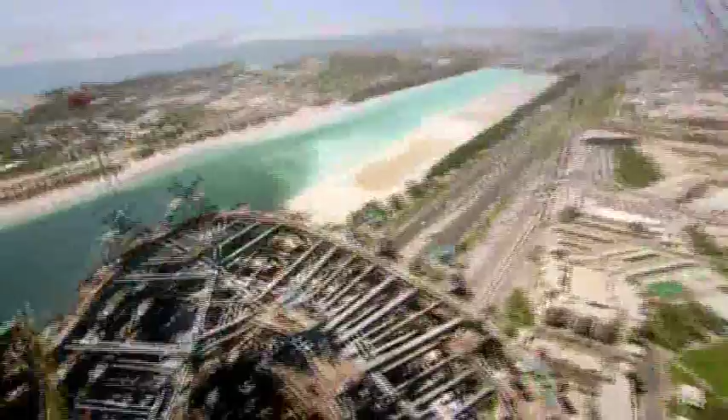Dubai is famous for its audacious engineering projects. But now, its neighboring city, Abu Dhabi, could surpass them all. This is Capital Gate, the most inclined skyscraper on the planet. It defies gravity, leaning at almost 5 times more than Italy's Leaning Tower of Pisa. To make it stand up, it'll take some extraordinary engineering that could rewrite the skyscraper rulebook.

Situated on the edge of the Persian Gulf lies the Sheikhdom of Abu Dhabi. It's the largest and richest of 7 states that unified in 1971 to form the United Arab Emirates. Abu Dhabi is undergoing one of the biggest makeovers of modern times. Its ruler, Sheikh Khalifa bin Zayed Al Nahyan, wants to join the City Super League. And he's spending over $200 billion to transform his capital into a world-class business and tourist destination.

He's already spent a reputed $3 billion creating the most expensive hotel ever built. The Emirates Palace boasts 114 gold domes and is the height of luxury, where rooms cost up to $12,000 a night. And that's not all. He's built one of the largest and most opulent mosques on earth. Capable of accommodating 40,000 worshippers, the Grand Mosque boasts the largest carpet on the planet and the world's biggest gem-encrusted chandelier. But even these structures have not quenched his thirst for the extraordinary.

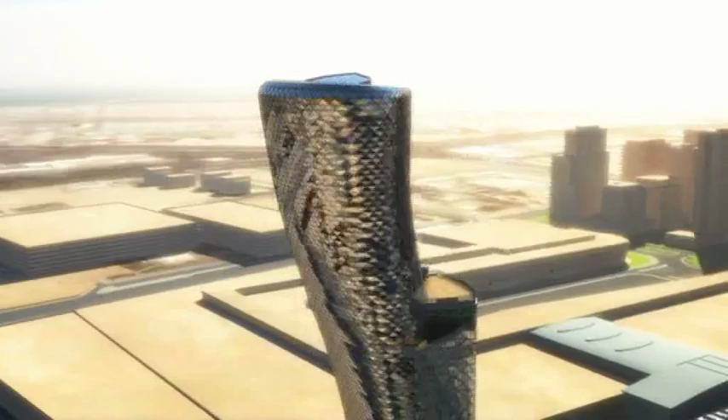The team come up with an extraordinary design. A tower that spirals out of the ground to 160 meters. Inspired by a desert whirlwind and the splash of a wave rising over the sand. This gravity-defying skyscraper tilts almost 5 times more than Italy's Leaning Tower of Pisa. No single angle of this tower is the same as another. It's a structure guaranteed to amaze. We really wanted this to happen. They could see a vision suddenly. They could see something that would stand for them. Then there was no stopping us.

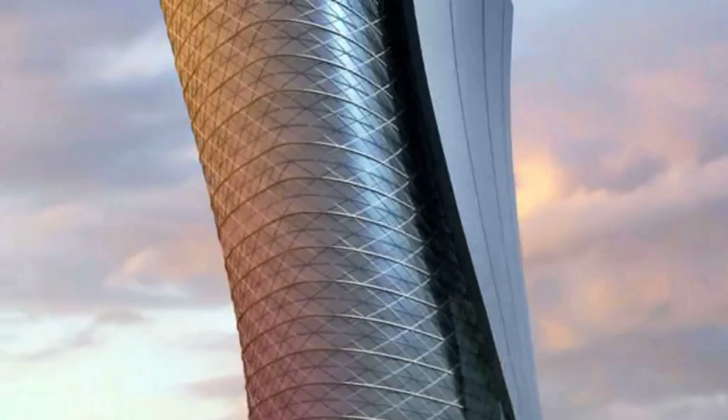Sheikh Sultan wants the lower floors to become the most prestigious office address in Abu Dhabi, with the top 18 levels assigned as a 5-star hotel fit for royalty. But for maximum impact, this landmark skyscraper also needs a prestigious location. The Sheikh decides the tower will stand next to a monument of national importance, the Grandstand. Built by his uncle and founding father of the United Arab Emirates, Sheikh Zayed, it's used to this day for national celebrations. This monument and the skyscraper will link Abu Dhabi's future with its past.

Over the past 50 years, this land has experienced extreme change like no other. The discovery of huge oil reserves in 1958 set the wheels of progress in motion. Abu Dhabi's ruler, Sheikh Zayed, had a vision to unify the sheikhdoms and secure their financial future from Western dominance. He then set about using his black gold to create a city that rose out of the desert. Today, Zayed's legacy is all around, and now his son wants to leave one of his own. To transform Abu Dhabi once again, but this time to put it on the world map.

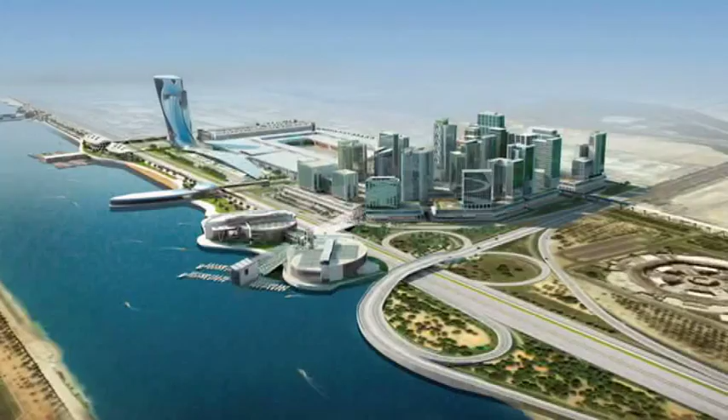Sheikh Khalifa plans a new $2 billion business district called the Capital Center. Situated alongside the Middle East's largest business hub, the Abu Dhabi National Exhibition Center. It's the ideal location for an architectural icon. And inspired by its location, the new tower is named Capital Gate.

Now, the idea must make the leap from the drawing board to the construction site. The only problem is, no one has ever attempted a skyscraper like this before. Everyone realized that this is a crazy structure to build, and how are we going to build it?

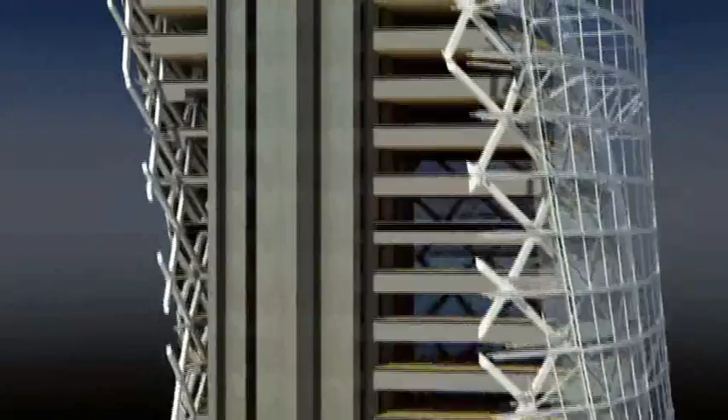To make Capital Gate's gravity-defying design a reality, it'll take some extraordinary engineering, and the challenge begins on day one. Its top floors overhang its base by 33 meters, creating huge forces that want to rip the building's foundations out of the ground.

At the construction site, project architect Tony Archibald is daunted by the task ahead. When I first joined the job, I was shown the drawings, and I kind of did a double take, and I wasn't quite sure that I got the correct understanding of the project, and it took me a few moments before I realized what we were about to undertake.

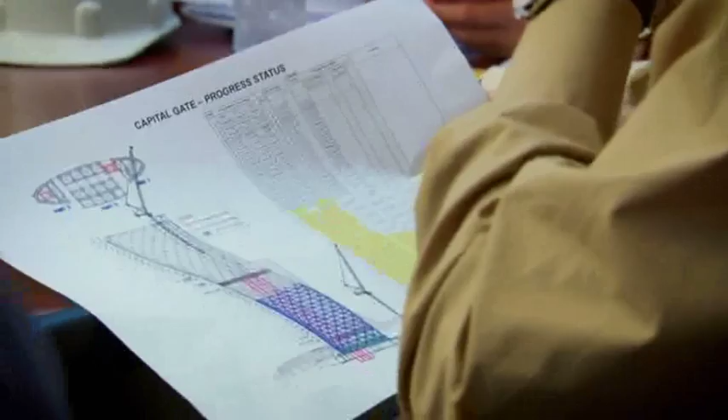Keeping Capital Gate upright is a huge engineering challenge. There isn't just one solution. To overcome the forces of gravity, it will take a whole range of pioneering techniques. But the task starts with the foundations deep underground. On one side of the building, the weight is going down into the ground. On the other side, it's being lifted out of the ground. And that's due to the large overhang that we're having to deal with.

The solution requires almost 400 concrete piles that work in two different ways. On the leaning side, half of the piles push the overhang's forces into the ground. On the opposite side, the remaining piles anchor deeper into the bedrock. They resist the stretching forces trying to wrench the building out of the ground. Finally, to evenly distribute Capital Gate's forces into the piles, a deep concrete slab reinforced with steel is laid on top. What the foundations taught us is that every single aspect of this building has to be custom engineered.

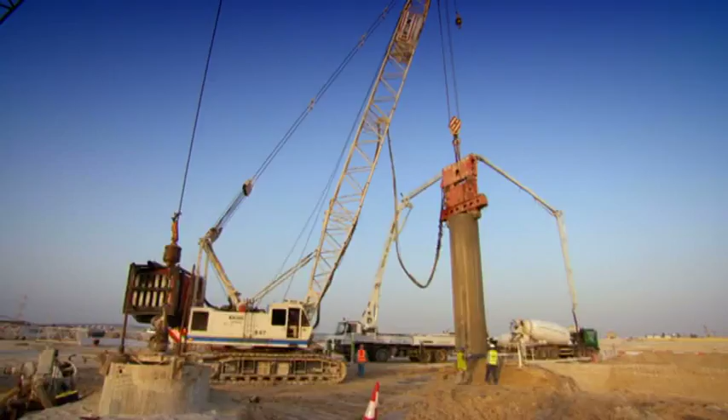Excavators dig out a colossal 6,000 cubic meters of sand. And over 8 weeks, hundreds of piles are driven into the ground. We had an awful lot of piles to put in at very close proximity. It was a real difficult challenge. There can be no let-up on this schedule. Sheikh Sultan wants Capital Gate complete by an impossibly tight deadline.

In less than 2 years' time, Abu Dhabi will host the World Future Energy Summit. Over 3,000 delegates from 50 countries and the world's press will convene at the neighboring Abu Dhabi National Exhibition Center. It's the perfect opportunity to showcase Capital Gate and prove Abu Dhabi is at the forefront of innovation. But this gives the team just 24 months to design and build a unique skyscraper.

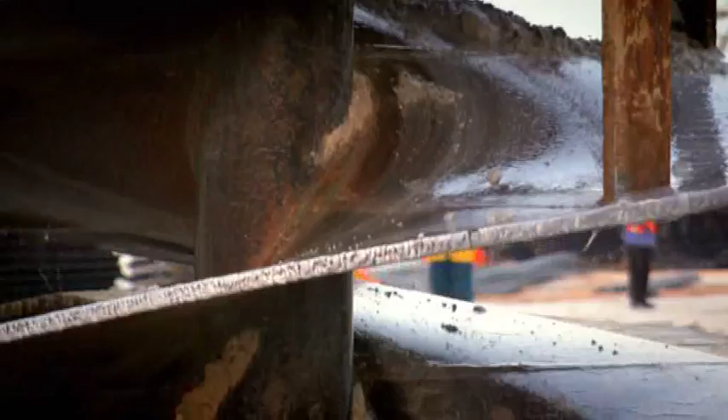With the foundations finished, building above ground can begin. But because of the dramatic lean, it will have to be constructed in a very different way to a conventional skyscraper. We realized once we'd done the foundations that this was going to be the first of many difficult problems. A normal skyscraper requires a solid core to hold it upright. But Capital Gate's curves will just crack and topple a standard core. Engineers must discard conventional thinking and devise a way to defy gravity.

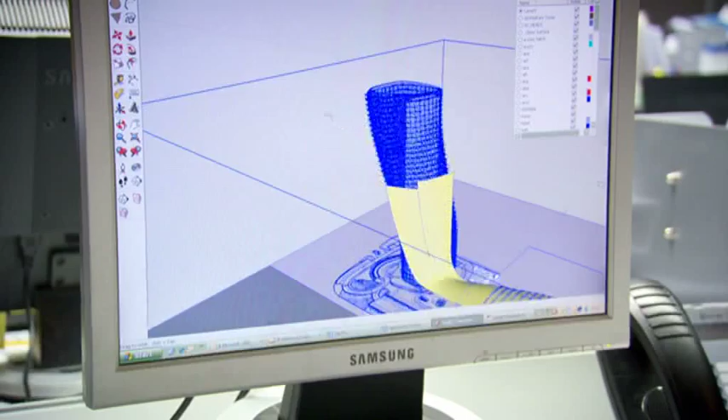Inspired by the nearby desert landscape and its wind-shaped dunes, architects have designed a curved leaning tower. But it'll take some audacious engineering to stop Capital Gate from falling over. Normal skyscrapers are built around a slim vertical core, which helps to channel the building's weight into the ground. There's so much overhang on this building that a conventional core, there was no way it was going to work. You just can't build a straight core. It's just not strong enough.

Capital Gate's design would cause a conventional core to bend dangerously. The pull of the massive overhang wants to stretch the core on one side, causing the concrete to tear apart.

Structural engineer Mona Vassi knows it's a serious problem that must be solved. When I saw this one, I thought it's impossible, it's not going to work. It's just some sketch somebody left somewhere. But I always think that for the architects, it's easier for them to just draw something, but it's not easy for us to fulfill or satisfy their needs.

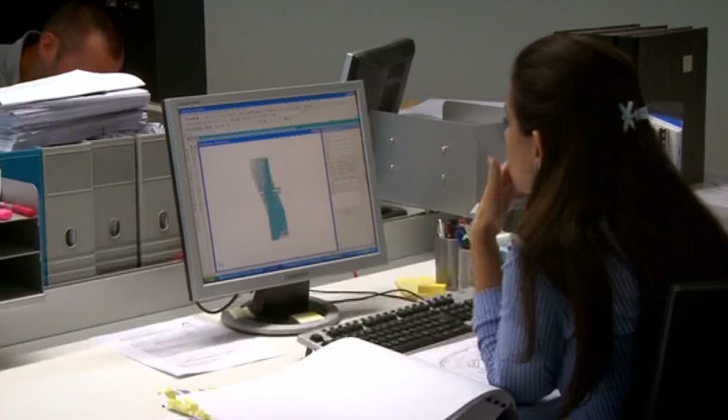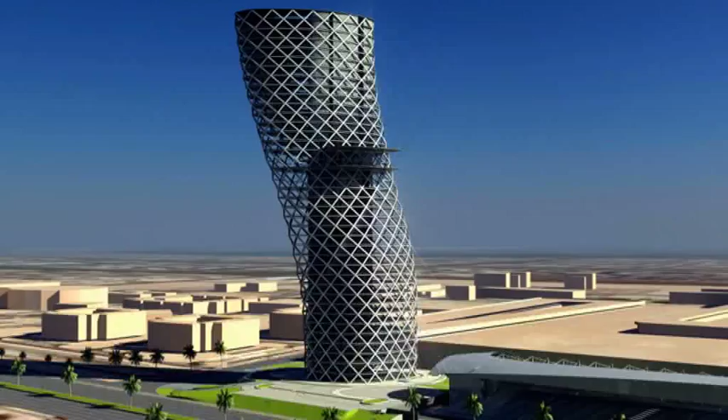The engineers developed two groundbreaking solutions. The first part of their plan is to build the core with a curve, bending in the opposite direction to the building's lean. As the structure grows, its weight pulls the core straight. In total, it shifts 350 millimeters, and the effect is significant. The concrete that would have been stretched by the overhang's pull will now be compressed and strengthened. You build it bent, and then as you add the slabs to the upper levels, it pulls it back into vertical. So basically that whole vertical core is in compression, and that gives it immense strength.

The core grows 4 meters a week, and construction manager Les Fairchild is in charge of building it. This is probably the most complex core that I've come across. It's built at an angle, and effectively the core holds the whole building up. The core is built using a technique called jump forming.

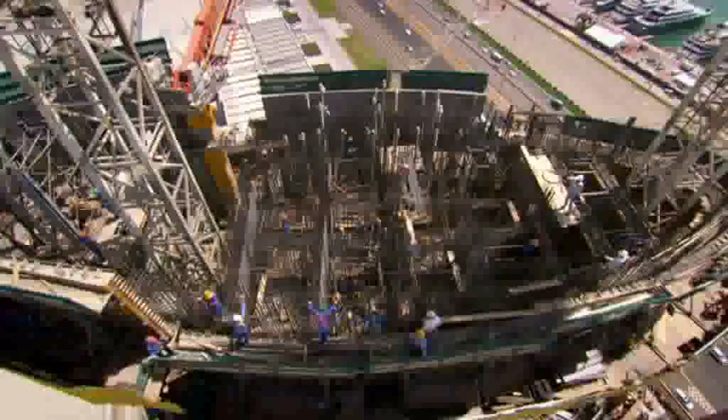First, a dense mesh of steel reinforcement is assembled. A mold then closes around the steel to form the shape of the core. The steel mesh is then filled with concrete. Then the mold or form can climb up the core wall for the process to start all over again. Jump form is a hydraulic platform. Once we've cast each 4-metre level, we simply attach it to some runners and we jump it hydraulically up to the next level.

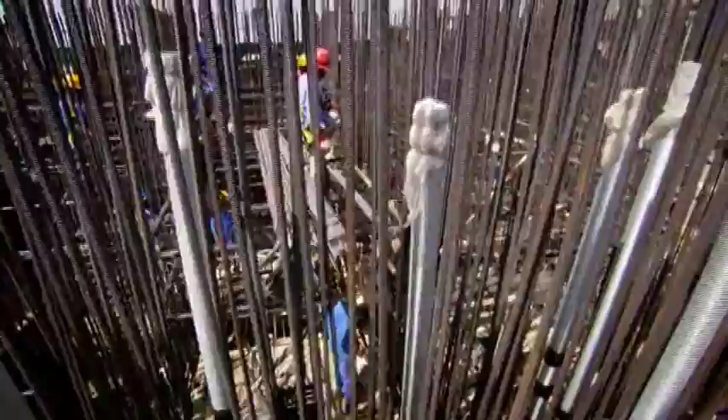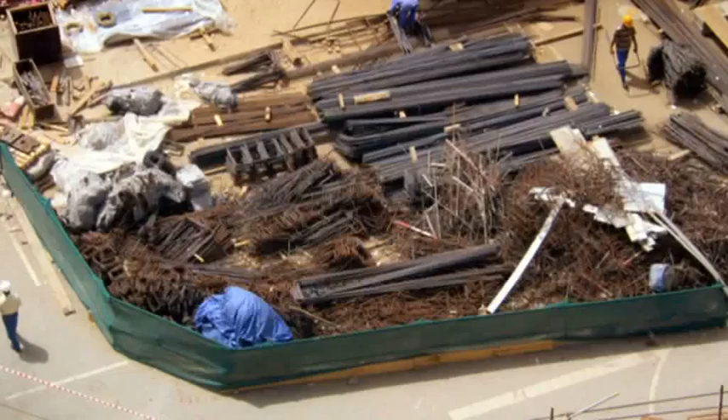The core will be strengthened as it straightens. But for the core to carry extreme loads, the concrete must be reinforced using steel rods called rebar. The rebar is installed during the daytime, but temperatures of up to 50 degrees Celsius and concrete don't mix. It dries too fast and could crack. To set at the right speed, the concrete has to be poured during the cool of the night.

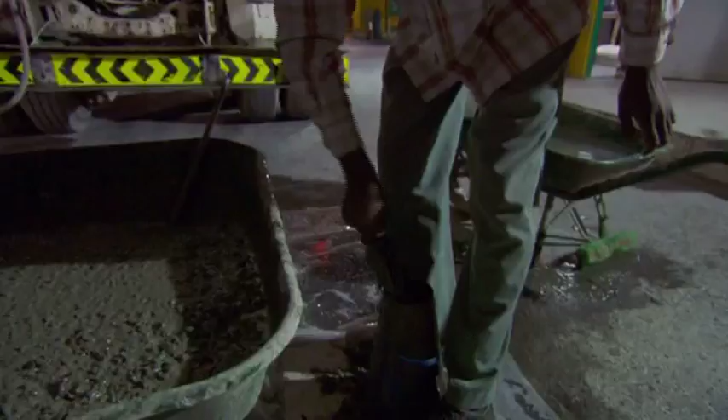As the core grows higher, the liquid concrete has to be pumped over longer and longer distances. So the consistency of every batch is first checked in a slump test to ensure it won't block the pipes. When you first see it coming out the wagon, you can usually tell whether it's a tight mix or a loose mix, and that's what we're testing for really in the slump test. We simply make a cone, lift the cone off, and depending on how much it reduces in height, tells you exactly what the slump is. The one we just witnessed is 215 millimetres, which is within the specification, so that's good to go.

Whilst the truck drives to the pump, Fairchild needs to get onto the core. He can take the stairs, but 90 metres up is a long climb. He knows a much faster way: crane lift.

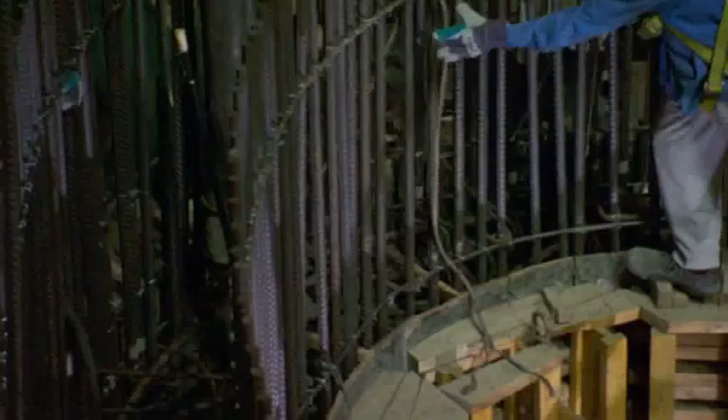It's going fairly well. We've had a nice continuous supply of concrete, and we're now pumping it up to the upper levels of the building. And the lads are just steadily working away. They actually work from one side to the other in metre deep layers, so they're doing everything right. It's always exciting when we pour concrete. It means it's another achievement, really. We're going up another level.

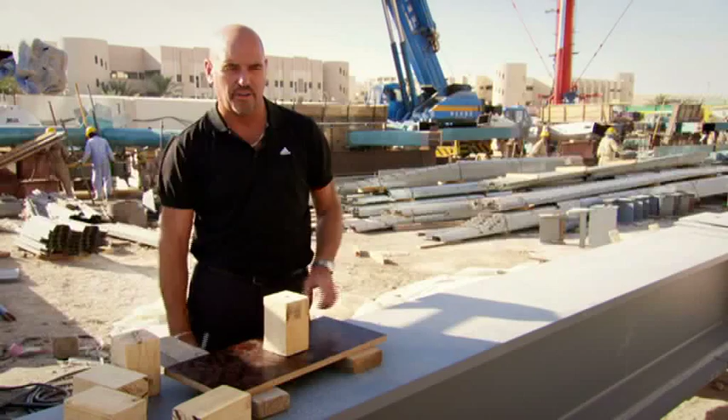But building the core out of alignment and packing it with rebar still isn't enough to stop gravity toppling Capital Gate. What we came up with is a post-tensioning solution where we introduced much more reinforcement into the core wall and then used the tensioning process. Basically that was done by introducing high tensile strands to the centre of the walls. When we reached the designated height, we simply applied tension.

We're actually stretching the tendons that fall through the wall, and we're pulling them tight, and that's done by a tensioning machine. So effectively, when the tension is complete and the load was applied, the core would stay intact, and the additional reinforcement would prevent it from falling over.

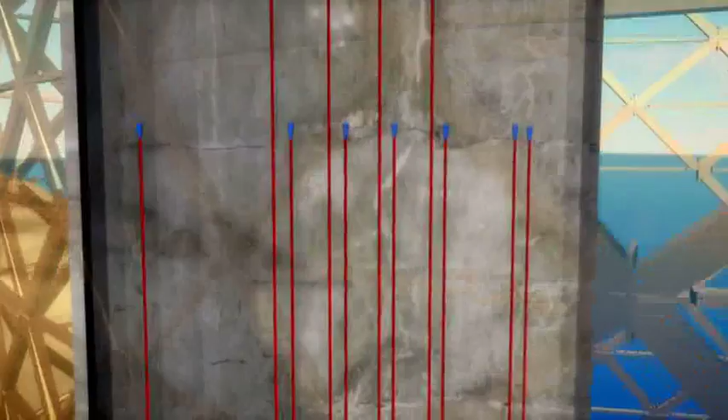To post-tension the core, 146 steel tendons are threaded vertically through the concrete. Each tendon is 20 metres long and runs through 5 floors of the building, overlapping each other for maximum strength. When the tendons are stretched, the stress counteracts the pulling force created by the massive overhang, stopping the concrete from tearing apart. Okay, stop. Okay, start moving.

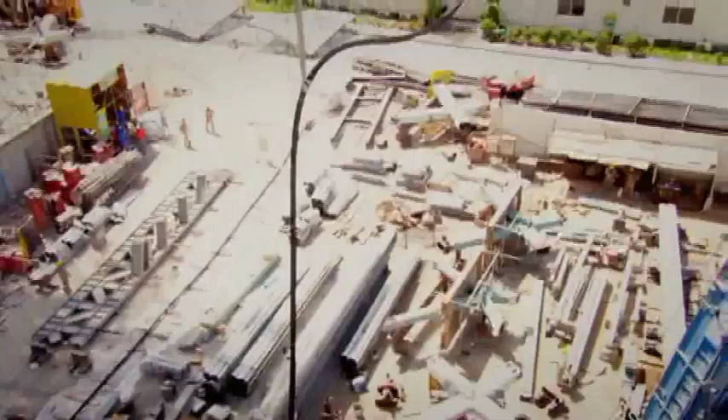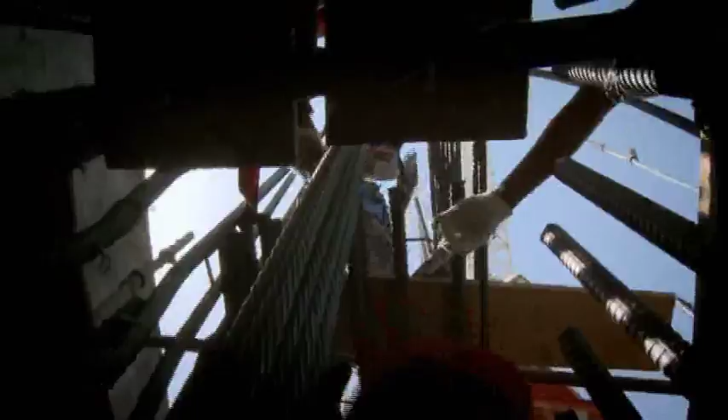On site, the team are post-tensioning the core. But no one has ever attempted this vertically in a skyscraper. The long tendon is lifted to the top of the core. The team used the steel tendon's weight to force it through a duct already cast through the core. Once the tendon is in position, the team lock off both ends, ready to tension its individual strands.

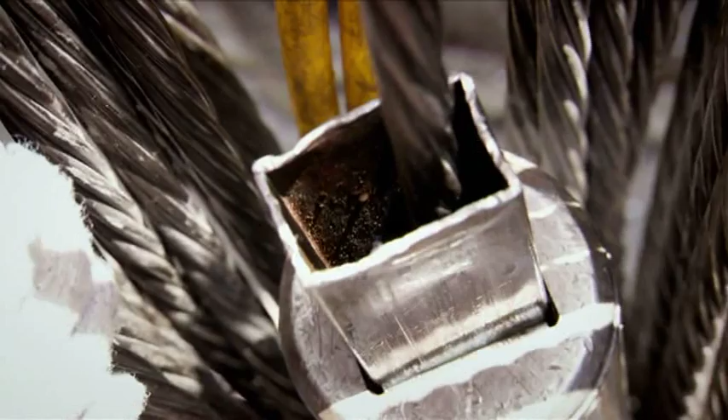Okay. A hydraulic jack clamps around one strand at a time and stretches it. It's equivalent to about 5 family cars pulling on one end of the rope. With the steel tendon now stretched to the right stress level, concrete pouring can continue upwards. The quantity of cable that's been used is approximately 120 tons and 120,000 meters in length. It's about 44 times the Golden Gate Bridge. This process is repeated over and over and means the core should withstand the huge loads generated by Capital Gate's extreme overhang.

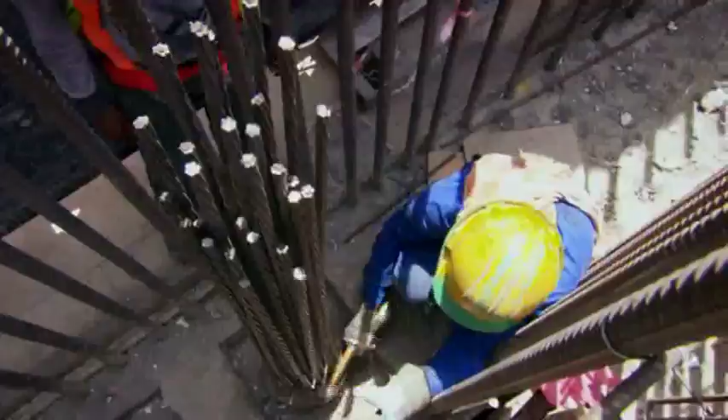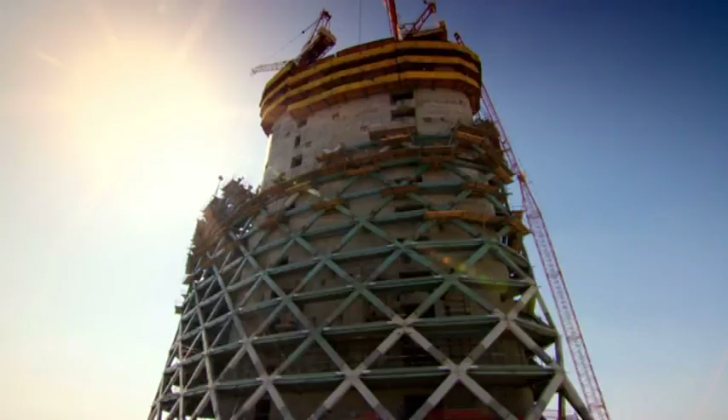But now, an even greater challenge must be tackled. The building's twisting, leaning design must somehow be turned from theory into reality. And once again, it'll mean bending the rules of architecture. To create Abu Dhabi's architectural icon, Capital Gate needs an exterior curved leaning frame. But once again, the building's extreme tilt creates a problem. The shape of the building with this very pronounced overhang meant that traditional skyscraper building solutions just weren't going to work. There's no way.

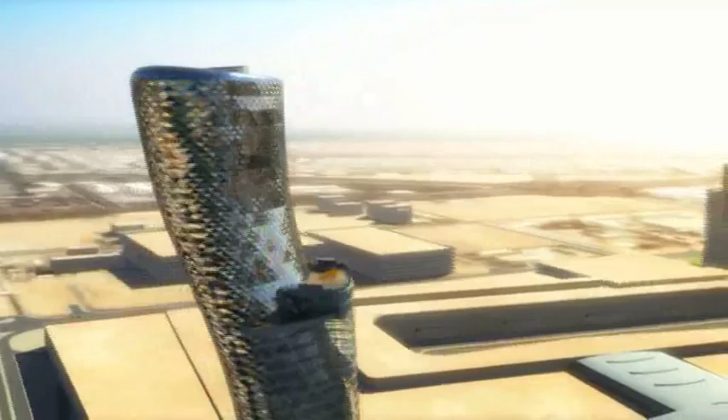Skyscrapers are often built with reinforced concrete external walls, which combined with lots of internal columns help to channel loads through the building and into the ground. But this system is not an option when the structure leans an extreme 18 degrees. We couldn't put any columns in this building, so we had to come up with a solution of how to transfer all these loads. Without load-bearing internal columns, Capital Gate's outer walls must handle even greater forces. But the building design requires it to be thin to maximize floor space and allow for huge panoramic windows.

Irfan Ahmed is one of the engineers who has to find a solution. For structural engineers, always it's challenging to accept the architectural requirement, you know. They always want thinner and thinner and thinner. Surprisingly, the humble chicken could help with this engineering dilemma. It is essentially a skin of structure around the outside of the building, not unlike an egg.

An egg can withstand huge loads because it evenly distributes forces down through its shell, which means the shell can be thin, creating more space inside. So it's very, very thin, it's very, very strong. If I try to crush this egg, you can see that it's actually amazingly resilient. So let's see how resilient.

Here I have 170 eggs laid out, and we're going to put load on top of these in the form of breeze blocks. Moment of truth. So far, so good. Each one of these blocks weighs 15 kilos. So we've nearly got half the weight of a car on here now, on our 170 eggs. Let's see how far we can push this.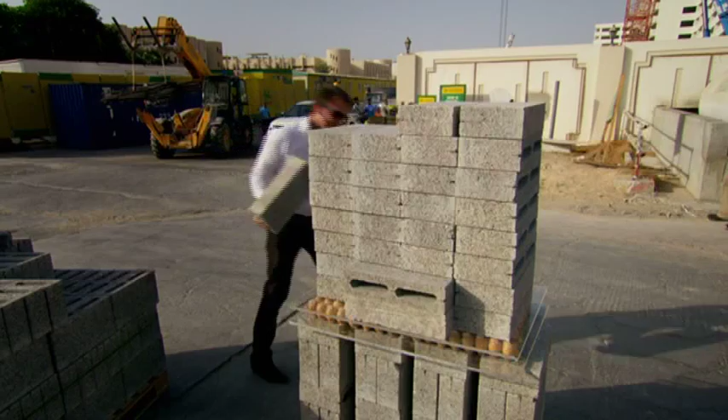That's 30 blocks, and I think it's about to go. It's going big time now. This is it. This is the end. Let's go! These eggs eventually crack under the weight, but they withstood over 450 kilos, half the weight of a family car. Yeah, we used to have it all around the floor.

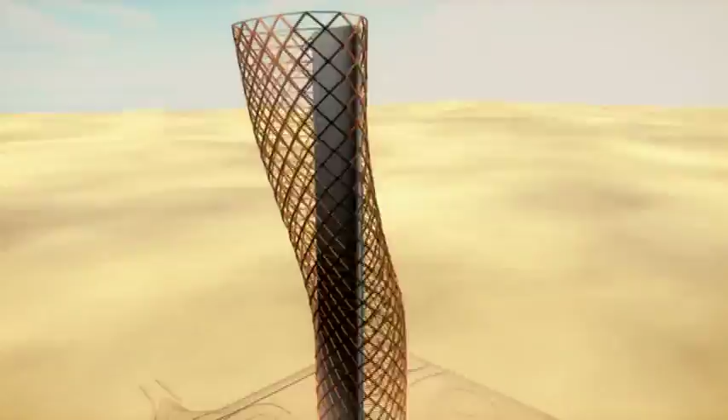Capital Gate can't channel forces with eggshell, but it can use the principle of how it works, using a diagrid. A diagrid is a giant mesh of steel that wraps around the core. Steel beams connect to a node or joint to form a cruciform section. 720 uniquely shaped sections link together to form the thin but immensely strong diagrid.

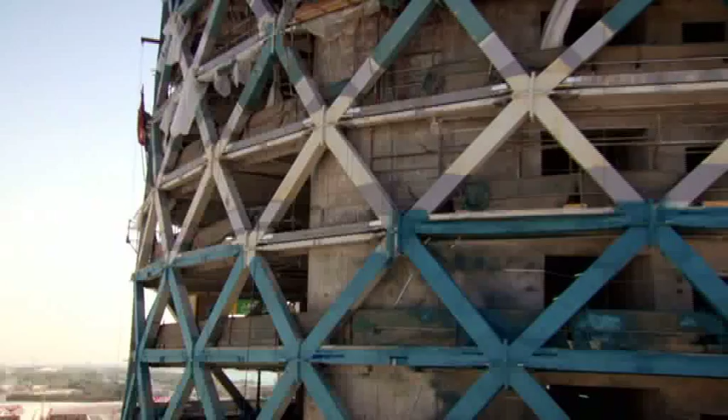Working together, these cruciforms equally distribute the forces down the outside of the building. The way it does that is by making a uniform net so that the forces are very evenly distributed. And that means that we can get away with slenderer sections. On site, a team of 240 steel fabricators assemble the diagrid. They've built the easier straight part of Capital Gate's base.

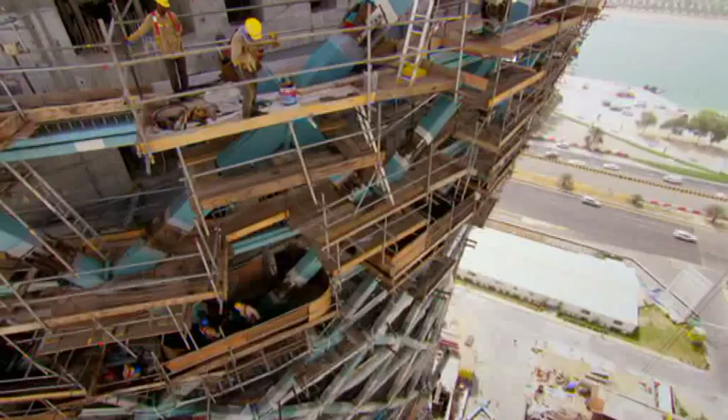But now the structure is starting to lean, making installation even more challenging. Each cruciform, weighing up to 16 tons, has a unique geometry and must be crane lifted at a precise angle. If the diagrid is not assembled with millimeter accuracy, the mesh will not channel the loads and the structure could be weakened.

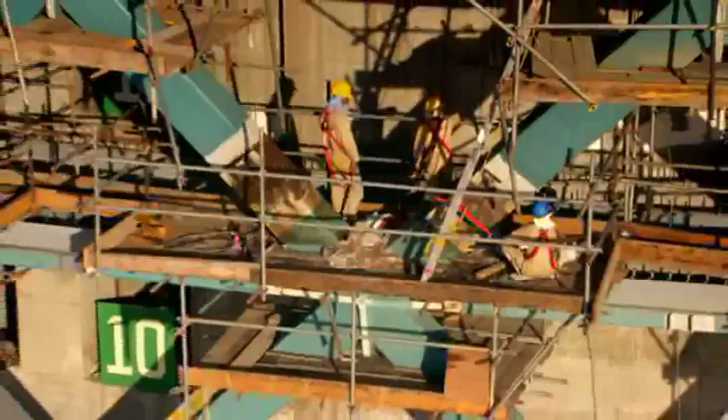Capital Gate's engineering is daring, but so is the schedule. On a normal timetable, engineers would design the whole building before construction begins. But to meet the 24-month target, the team must design and build Capital Gate simultaneously. It's risky. A diagrid like this has never been attempted. The engineers are planning and redesigning just a few steps ahead of the construction.

Every tower you have a typical floor and you just copy-paste it all the way up. It was not the case with this tower. Nothing was typical in this building, nothing. The way the forces flow through the diagrid is highly complex. As a result, the tiniest design change can have a huge impact on how the cruciforms below channel the forces. You change something on 34th floor and it will have an effect on 27th floor, let's say. There was nothing you could predict.

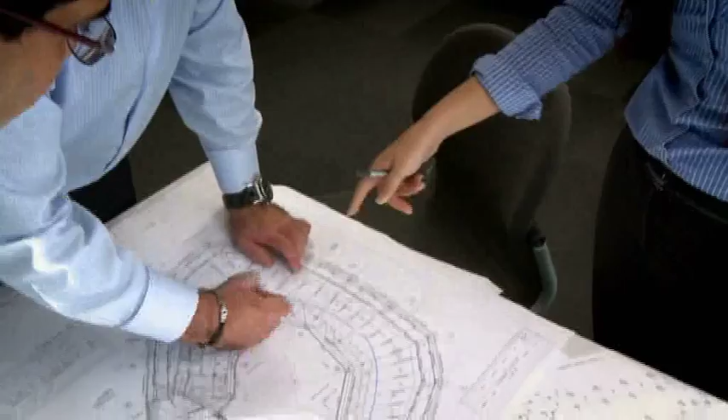Keeping up with design changes is a constant process. This diagrid is a real nightmare for us. As soon as we get some call from the team and they said, we are going to change it, I said, my God, we have to redo it again, reanalyze everything. The engineers must communicate closely with the expert steel fabricators. They design and manufacture the diagrid 150 kilometers away in the neighboring emirate, Sharjah.

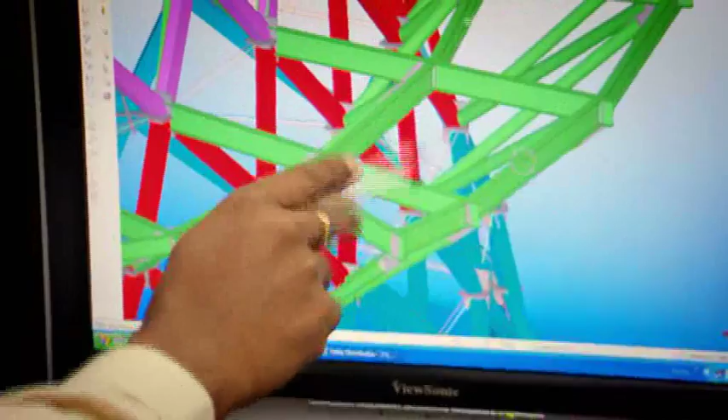Here, cutting-edge construction is the norm. They've built one of Malaysia's Petronas Towers and Dubai's iconic skyscrapers, the Burj Al Arab and the Burj Khalifa. But Capital Gate's revolutionary design pushes even these experts to the limit. On the planning floor, project engineer P. Bhaskaran and his team need bespoke 3D software to tackle the building's highly complex diagrid.

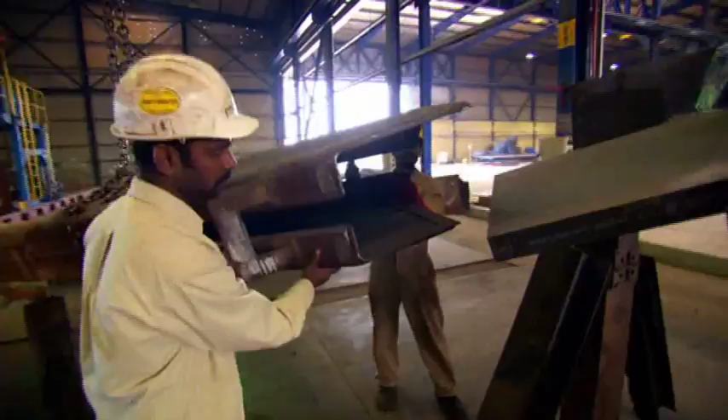The 3D modeling is done, and any unforeseen criticalities will be very clearly identified in the 3D model. Each one of the 720 cruciforms is precision engineered, not only to channel huge forces, but to connect with millimeter accuracy to the neighboring cruciforms and the glass facade. But to measure their exact angles, the team used some old-school technology: chalk. It might look unsophisticated, but it's highly accurate, ensuring all the elements will join together.

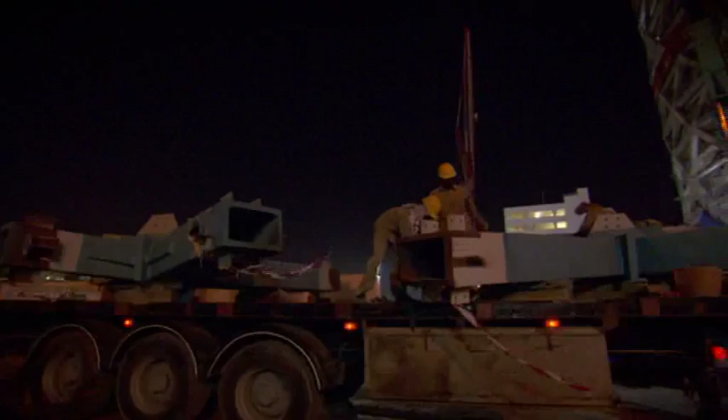To keep up with construction, the factory must produce 18 cruciforms every week. Constructing such a huge building, the critical building within the short span, without working 24 hours, it is absolutely not going to happen. As the skyscraper reaches new heights, the long hours start to pay off.

This design pushes the diagrid technology to its absolute limit, and in fact, far beyond what's ever been achieved so far. Even in your dreams, you're thinking about this project. So once you see the structure coming up, you forget all the long hours you spend and all the sleepless nights.

A colossus is fast emerging from the Abu Dhabi sands. Now, this leaning tower must be clad with a glass facade. And as always with this gravity-defying structure, it's going to require some revolutionary engineering.

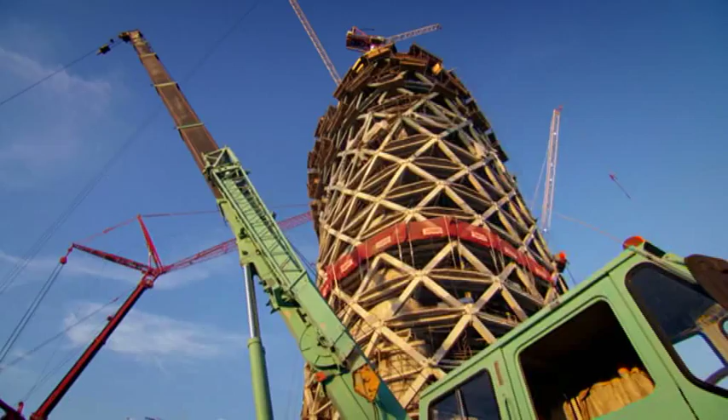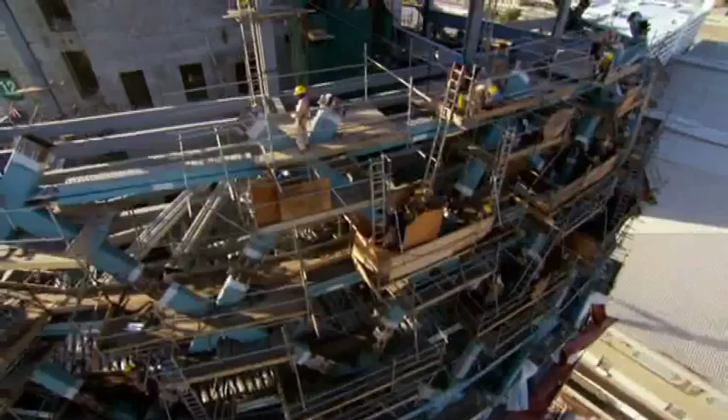Glazing Capital Gate's leaning curved frame is a major problem. Covering its unusual contours with curved glass will blow the budget. So the skyscraper's curves must somehow be clad using cost-effective flat glass panes. Fortunately, ancient Greek geometry can help. Because you've got a complex shape, it's an organic shape, it's a curved shape, the only way to model that with straight lines is to use triangles.

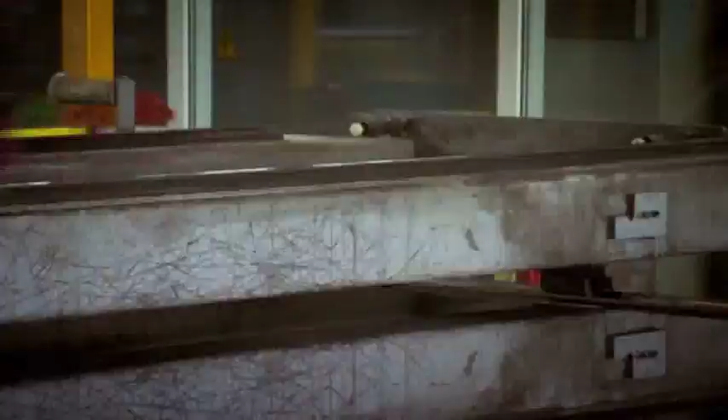Triangular panes can pivot in 3 directions, and when joined together can cover complex geometric surfaces. But because every angle of the building is unique, it'll take 26,000 triangular panes to form the facade. With so many glass triangles to cut, the local glass factory springs into action. Each pane is scored by an automated diamond cutter to an exact pattern. The triangles are then sent along the production line.

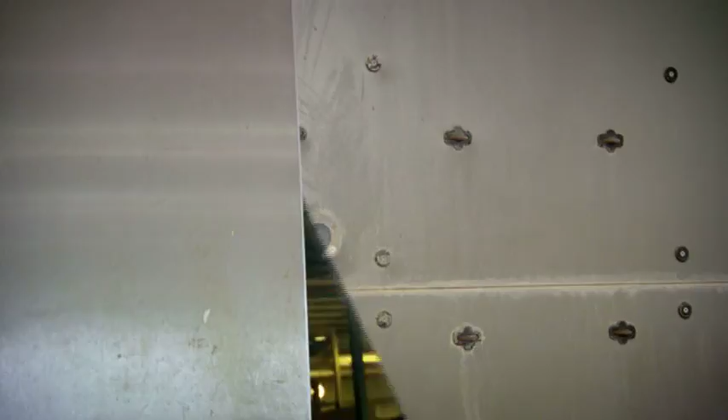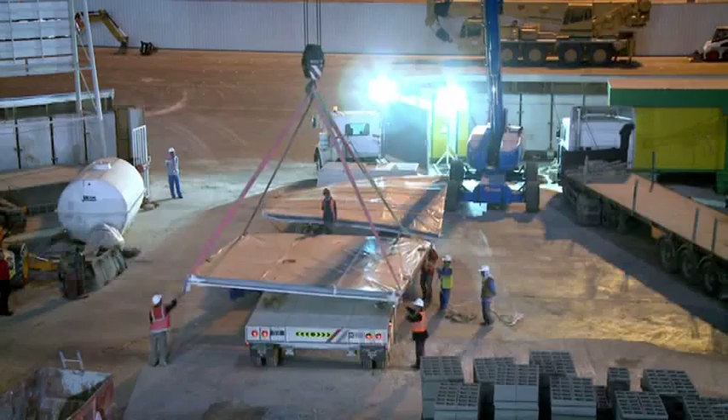The team is under constant pressure to deliver enough glass to the site. 26,000 panes would take years to install individually, but Capital Gate's punishing schedule only allows months to complete it. To fast-track, they need to think bigger and install 720 giant diamond-shaped panels, each formed of 36 individual panes. They are so huge, roads have to be closed during the night to deliver them.

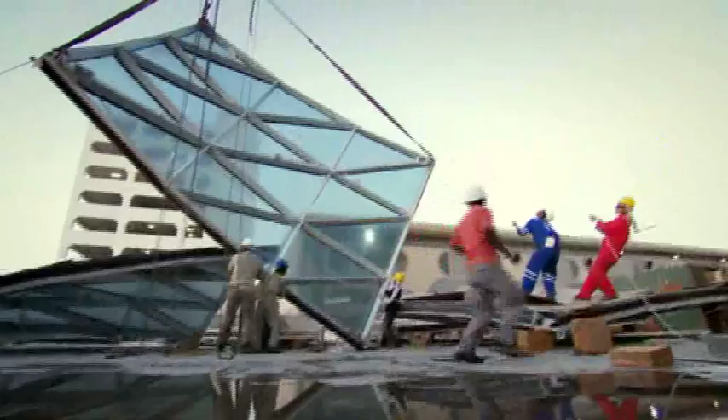It's then the day shift's job to lift them onto the diagrid. Peter Mayer is in charge of the team. So when we started installing these diamonds here on site, definitely we were nervous because we never have done this before. Hey, this side, 2 guys, hold it. After several weeks, 8 diamonds are in place and another 100 standing by.

But the glass design is so unconventional, it still has to pass a number of tests to prove it's up to the job. Because we'd already started the glass installation, the results of this test were absolutely key. Each panel is stacked one upon the other. So if we'd had any kind of problem, we would have had to unstack them, which would have had disastrous consequences for the program.

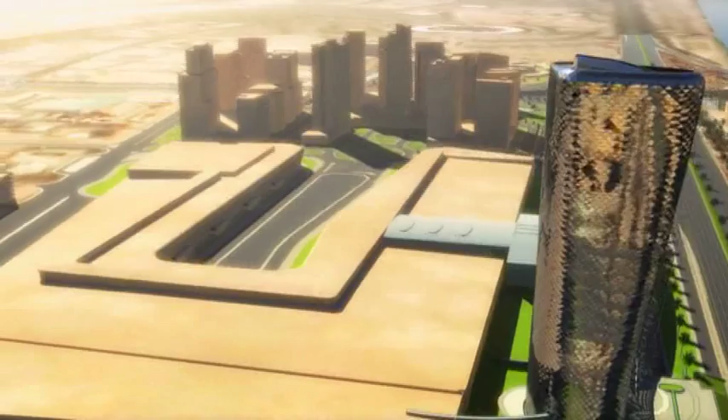This is no ordinary glass skin after all. Capital Gate's core straightens as it grows. The skyscraper will not stop moving until after completion. Normal glass facades can accommodate minute movements caused by wind and temperature changes. But to stop the glass shattering and keep the building watertight, the panels must be designed to shift by up to 20 millimeters. The scale of that kind of movement is almost unheard of in glazing systems. It's a vast amount of movement.

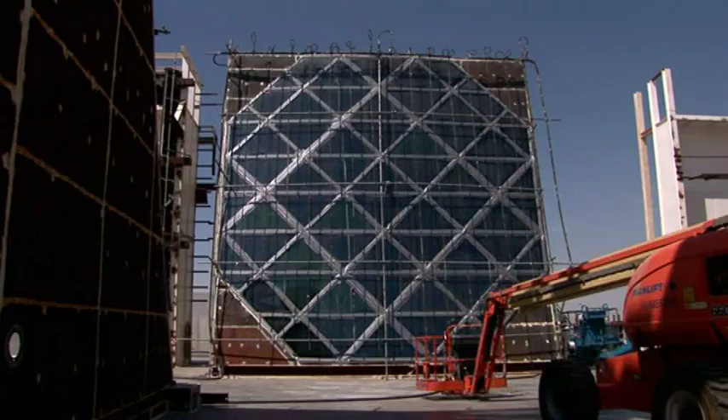With glass installation ongoing, construction manager Craig Rooney needs to know the panels will perform. We don't want to get to the top. We've done it, we've installed it, we think we've done a great job, and then it all leaks. The panels must be tested to the limit at a Dubai laboratory. A plane engine and many liters of water simulate worst-case scenario weather.

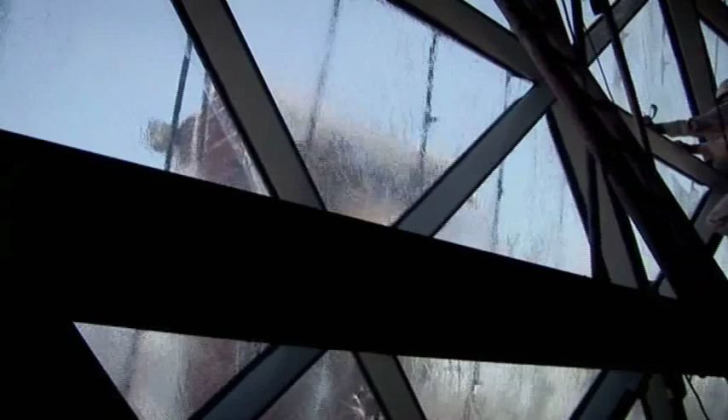Now the moment of truth. Any leaks could be a disaster. And it's bad news. The first time we got a full water test, we had a leak. The fact that we had a leak was devastating to the whole team and very alarming. The diamonds connect to each other by a bespoke 2-layer seal. The flexible spongy seal allows the diamonds to move and keeps water out. But if any water does seep through the outer seal, drainage tubes fitted at intervals let the water flow away.

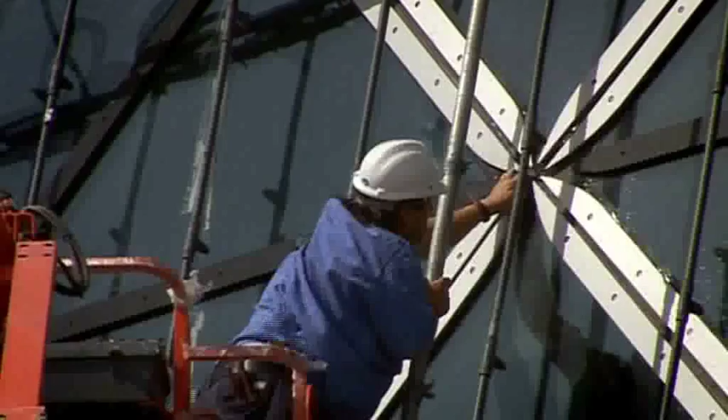The panel has failed the test. Water has flooded inside and penetrated the inner seal. If it was a fundamental failure, we're back to the drawing board, so the cost and the budget and the programme all go completely out the window. The panel is examined. Answers are needed fast. Fortunately, it's not a design failure. They discover a drainage tube is only blocked with sand. The problem resolved, installation can step up a gear.

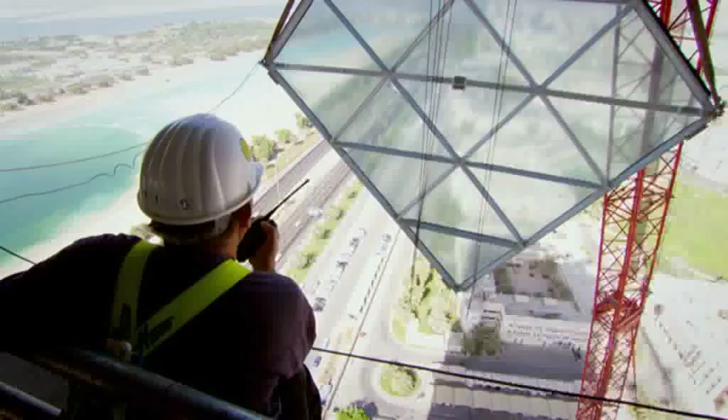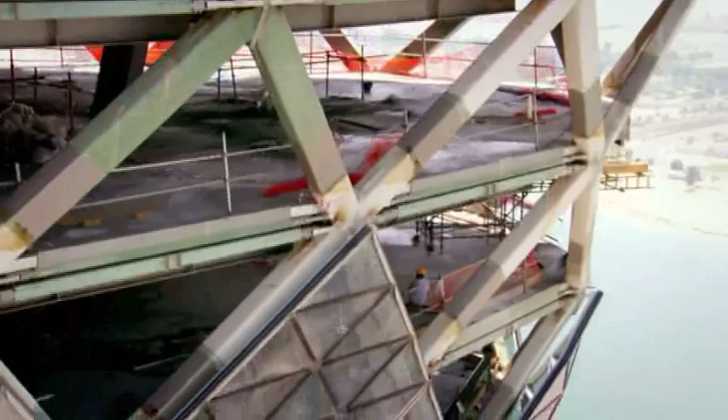But as always with this audacious building, one problem is solved and another is just around the corner. To give Capital Gate's five-star hotel lobby the wow factor, architects again plan to push the design to the extreme. Now they want to build an infinity pool and a restaurant, hanging 100 meters above the ground.

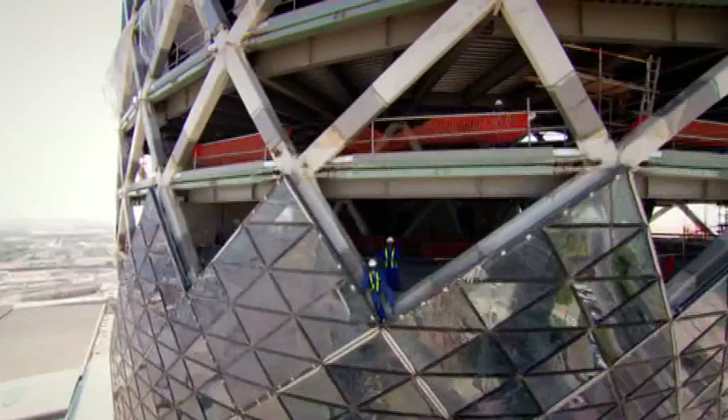18 months into the build, Capital Gate's design is about to give a new slant on high-rise living. The architects want a pool deck and restaurant suspended in the sky, but it's an engineering headache. There's so many requirements that architects have that really put us in so much trouble as engineers, but you want to make sure you have a safe structure.

The design calls for a two-story extension, hanging without any visible support. But the pool's water alone will weigh 150 tons. The structure's huge mass means it needs reinforcement. We needed some supports from below, otherwise there was no other solution. I don't think you can have a cantilever that huge on this building, no way.

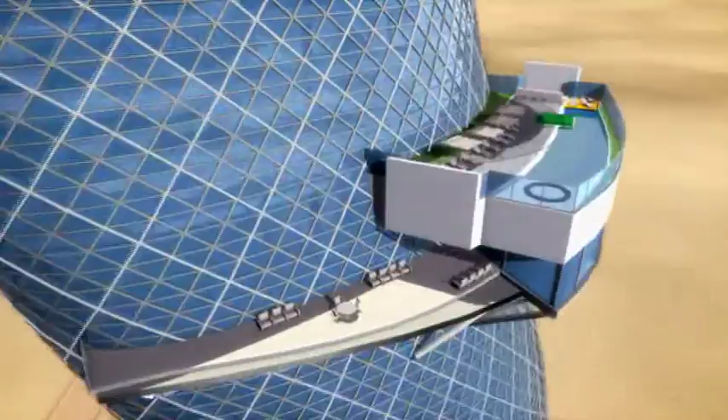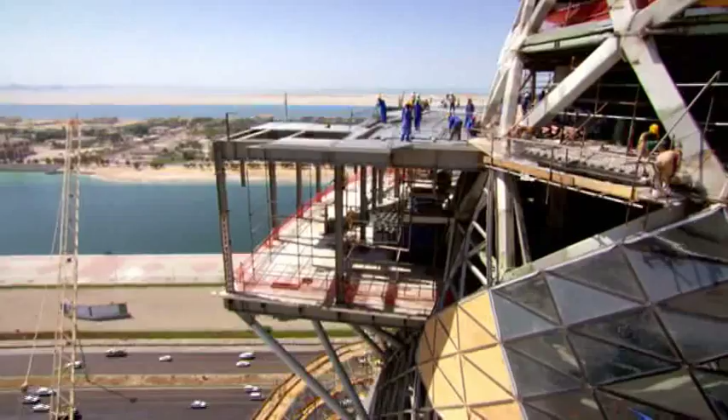The design will only work if it's underpinned with 22 steel struts. They will carry the loads back into the building. But the struts must also look delicate to meet the architect's aesthetic demands. On the construction site, 90 meters up, the pool and restaurant is taking shape. All of its structural elements are in position, except one. The team are raising its last 6-ton floor beam.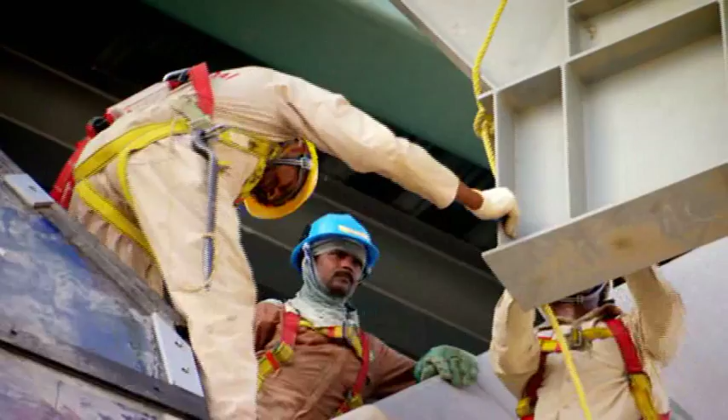It's taken many crane lifts, but one of the highest suspended swimming pools in the world has made the leap from blueprint to building. See all those lines that you just drew? They're actually drawing the same thing for you, but with a crane. But the feeling is indescribable.

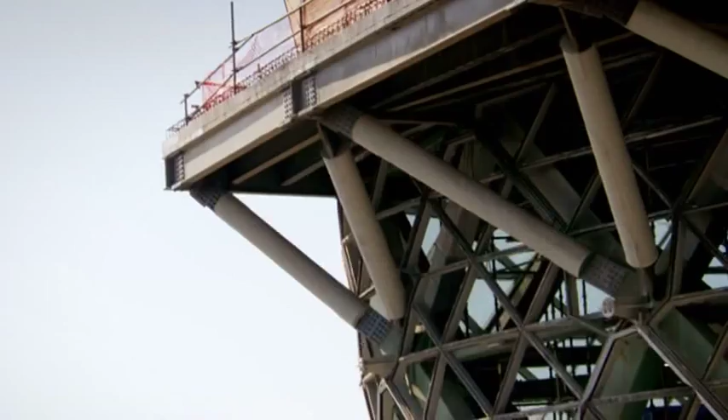And the structure's muscular struts and connections are also elegant. The idea behind these junctions is that they behave like the insects that can walk on water. They're sufficiently light that the surface tension keeps them above the water. So these little brackets dissipate the forces from all that weight.

Capital Gate is fast becoming an Abu Dhabi landmark. But the taller it gets, the more the weight of its upper floors is a problem. The skyscraper needs to go on a diet. And this time, the architects come up with a clever solution. The building has lots of visual surprises.

And one of the most important ones of those is the internal atrium. It's a kind of a light well that brings light from the sky deep inside the building, and it extends over half the height of the building. So it starts out very, very small at the bottom and opens out in a big funnel. This cavernous hole is good news for reducing weight and minimizes forces. But the atrium is a double-edged sword.

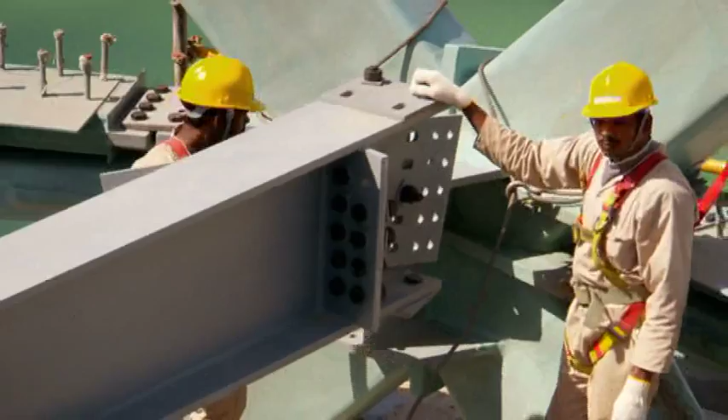The floors are critical in transferring loads from the diagrid to the core. A giant hole through 18 floors means these loads must find another pathway. It's a very, very big hole in every single floor plate. So our engineers really had their work cut out. You don't want to have an opening in your floor. You want to have more reinforced concrete to transfer these forces. The forces need to flow away.

And the solution is pioneering. An internal web of steel mirroring the external diagrid. This is the first time we've ever heard of this being done. The internal diagrid is actually a fundamental part of the structure. This funnel-shaped internal skeleton carries the forces of an 18-story building down to its tapered base and into the core.

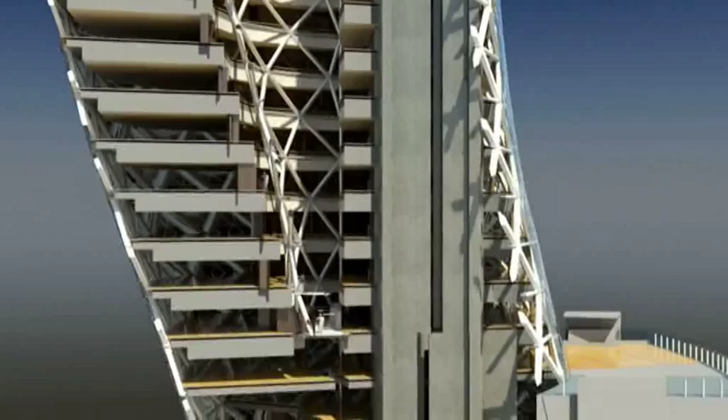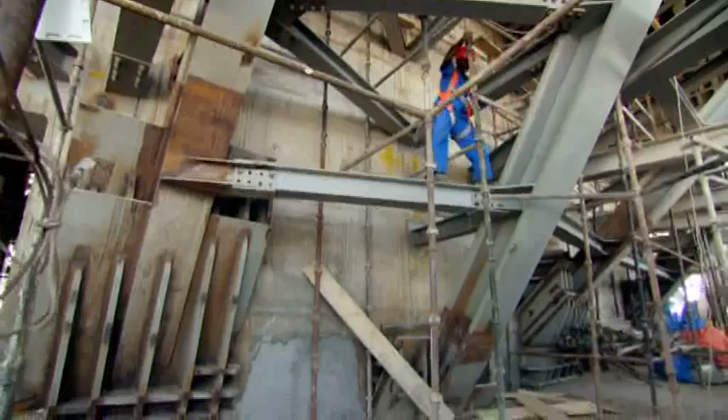But the loads are extremely high for such a small area. To stop the atrium punching through the core wall, the concrete needs protection. The answer? 6 giant plates of steel that brace the connection to the core wall. The connections are really a wonderful, wonderful piece of engineering. They're 8 meters high, they span 2 floors, and they connect back into the core. The atrium's near completion brings Abu Dhabi one step closer to achieving an iconic landmark.

But as the sun goes down, this isn't the only celebration underway. On site, the Indian steel team are holding an annual blessing to the Hindu god Lord Vishwakarma, the protector of architects and engineers. Their livelihoods depend on staying safe, and although they use safety equipment and are highly skilled, working with huge sections of steel at height is never risk-free.

We pay our respect to God and get the blessings from the God. We do that for the safety of all our workers and for the proper completion of the job. Every trade of workers, the basic tools they are using on site, has to be kept in front of God, and the workers feel themselves that they are in safe hands. The tools are now blessed, and the steel team's morale is high.

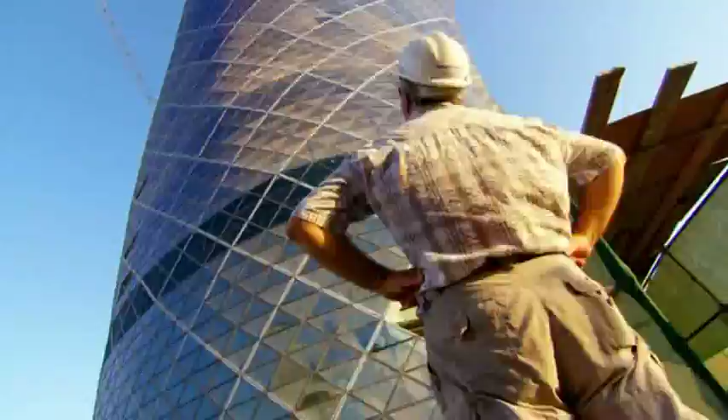But the glass installers, lifting diamonds to over a height of 100 meters, are getting the wrong kind of lift from Abu Dhabi's highly unpredictable wind. If the wind is too strong, then you can feel this in your hands when you hold these diamonds by rope. I always get nervous if I see the panel starting turning. And this makes me always a little bit afraid when I see diamonds going up and starting moving.

Maya has to act quickly, or this 4-ton diamond could smash into the building. Not for the first time, lifting glass is delayed by changeable weather. At this rate, Maya won't install the remaining 107 panels in time. But Abu Dhabi's wind isn't the only problem the Capital Gate team face. A last-minute design request comes in from the Sheikh's office that could have serious implications.

With just 6 months to go to completion, the Capital Gate team should be on the home straight. But those plans may have to be put on hold. I had a telephone call saying that we had to put a helipad on the roof, which I didn't think was a joke, but I was astounded that we got this at such a late point in the project.

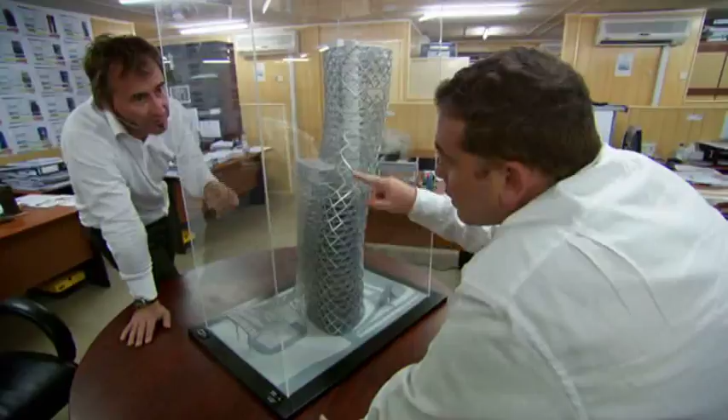Integrating what will be Abu Dhabi's highest helipad atop one of the world's most daring skyscrapers at first seems a simple request. But it actually poses 2 serious problems. It'll create new forces that must be absorbed by the already strained core, and unpredictable wind flows that can cause potentially lethal flying conditions. You get a thing called wind shear, tipping the whole helicopter onto its side, and this is a very real and very dangerous risk.

These rapid wind changes, known as wind shear, can affect the lift on helicopter blades. Aircraft can be blown off course, or literally fall out of the sky. There is no way that we could have any margin of error on the safety. The only way we could predict what the wind shear would be like on the top of the building was to model it in a wind tunnel.

In London, England, a scale model of Capital Gate is put through its paces in a high-tech wind tunnel. Just as the team fear, within seconds, wind shear conditions appear. Air currents are flowing over the top of the building, but then separate from the surface, spiraling inward to form a realm of turbulence.

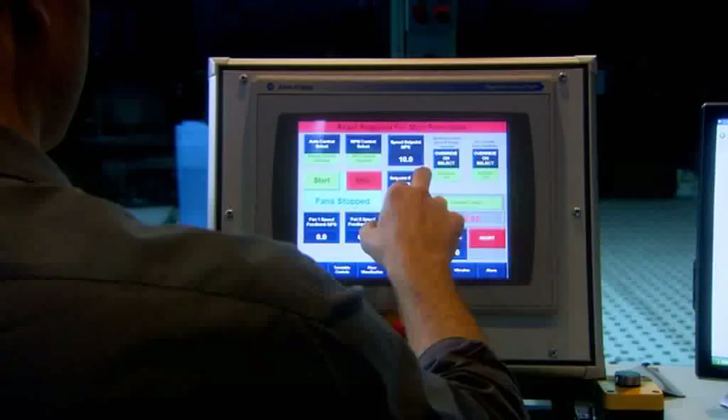Wind impacting the helipad is also creating huge suction forces. We're talking about very large forces here wanting to pull the helipad off the top of the building. Something in the realm of several large trucks or big rigs trying to pull this helipad away. To make the helipad safe, Aurelius and his team have to go against conventional thinking. We didn't think that lowering the helipad was actually going to be the optimum design, but we see reduced loading on the helipad as well as safer conditions for the pilots to land in.

Lowering the helideck to just 2 meters above the roof dramatically decreases the wind shear threat and means Capital Gate's core will withstand the additional loads. We're relieved, frankly. The tests have actually confirmed now that we can have it in our original design position, which is very low, which will mean that the profile on the skyline is exactly where we want it. But it'll take another 5 months to just draw up the helipad's blueprints, and a crane must be left behind to build it.

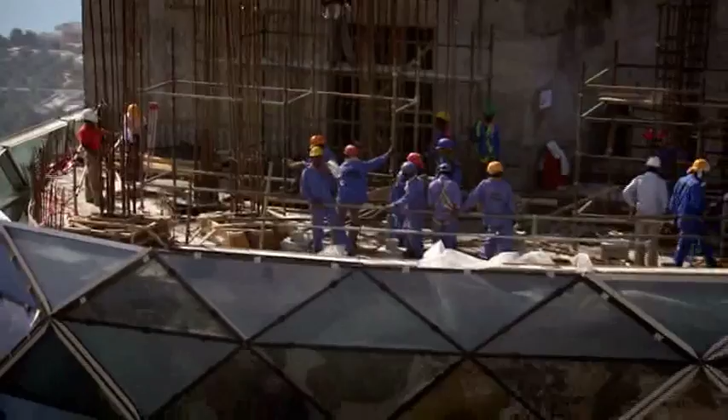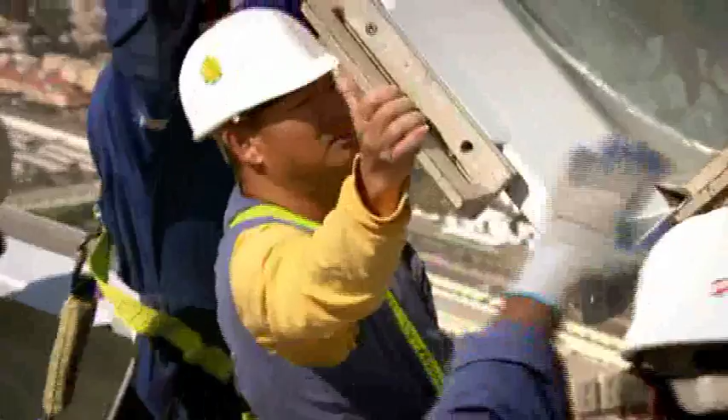Now, with only weeks to go until zero hour, the team are installing one of the last glass panels. It's a moment that once seemed a long way off. In my office, I have a plan of all the diamonds we have to install. And in the beginning, it looked like I'm in jail and I'm marking the wall with marks for each day. And so in the first time, I felt I never will finish this project. Just 10 months since the first diamond was fitted, the facade now shimmers in the sun.

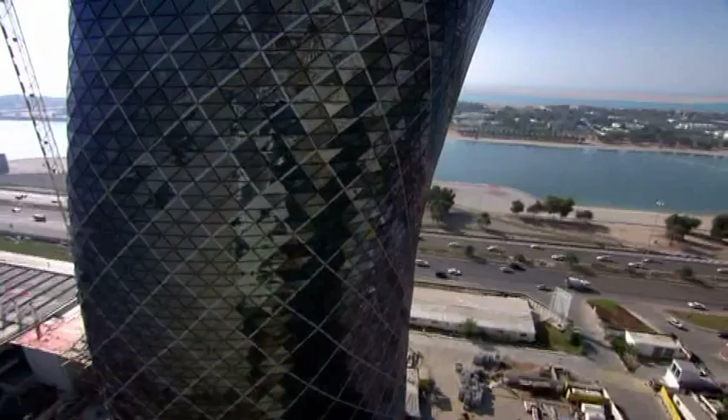Capital Gate's internal fit-out will take another year. Only then will its 5-star hotel and Abu Dhabi's most unusual office address be open for business. But against the odds, the team have created one of the most extraordinary megastructures on the planet. Capital Gate twists and spirals out of the ground, soaring to a full 162 meters. It's taken nearly 6 million man-hours to construct, and its overhang is spectacular. You see the building and you stand underneath the overhang. It's extremely impressive. It's a fantastic feat of engineering.

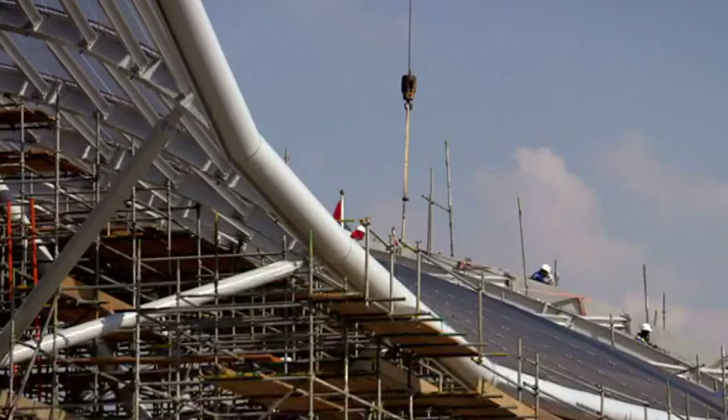I feel as though I've been here an eternity, but it's probably been the quickest 2 years of my life. It's been an amazing journey, and we've learned so much. And actually, I think we've demonstrated that some things that looked impossible or even ridiculous were actually possible. And Abu Dhabi's past will soon be physically linked to its future by a wave of steel that'll rise over the grandstand and splash up the skyscraper's mirrored glass. Abu Dhabi is a fascinating part of the world to be at the moment. It says to people we can step outside of the box. We don't have to follow the rules.

With the 2010 World Future Energy Summit just weeks away, Sheikh Sultan can be sure Capital Gate will show the world what Abu Dhabi is capable of. This building is really iconic. It catches the spirit of Abu Dhabi and will be part of the postcard image of Abu Dhabi. The team have achieved what some thought was impossible. A leaning tower that claims the world record for the most inclined skyscraper on Earth.